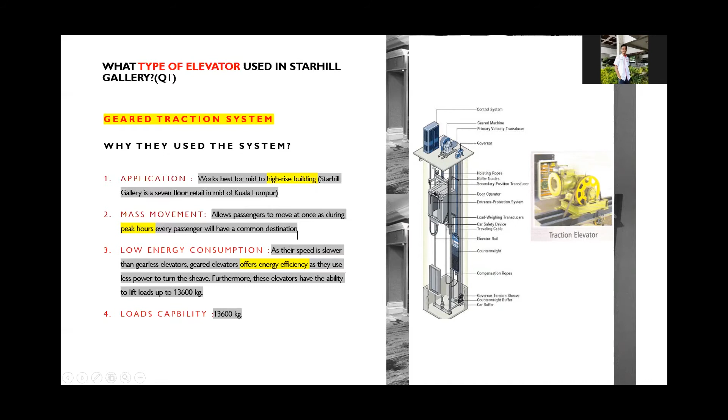As their speed is slower than gearless elevators, geared elevators offer energy efficiency as they use less power to turn the sheave. And then we move to question 2, how Starhill Gallery complements the UBBL. So there are a few laws implemented in the Starhill Gallery for the mechanical handling system.

Okay, so first of all, UBBL law 124, which is for all non-residential buildings exceeding 4 stories above or below the main access level, at least one lift shaft should be provided. So this building consists of 7 floors, so they have a few lift shafts.

And then the next one is openings in the lift shaft. According to UBBL law 151 and 152, lift shafts shall be provided with vents of not less than 0.09 square meter per lift, located at the top of the shaft. So this is the vent for the lift shaft, and every opening in the lift shaft shall open to a protected lobby. So the lobby is protected and not open.

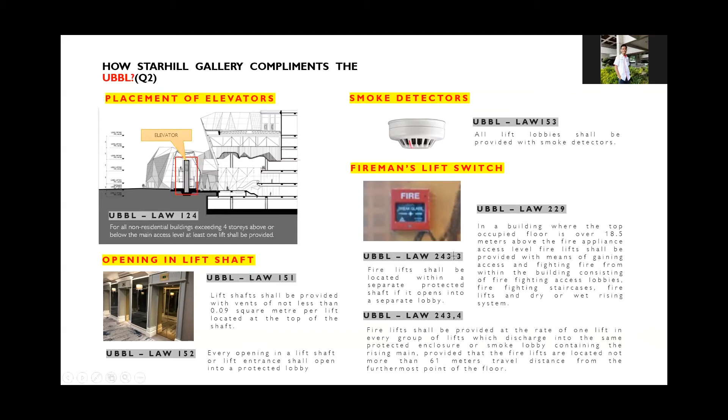And then UBBL law 153, all lift lobbies shall be provided with smoke detectors. So smoke detectors are located there. And then other laws are law 229, and law 243(3) and 243(4).

Okay, next, question number 3. As my friend mentioned before, Starhill Gallery uses a geared traction system. So what control system is used for the elevator? The first one is the collective control system, the full collective, which involves an up and down button on each floor and is able to answer calls in sequence regardless of travel direction. The second one is the motion control system.

It consists of motor, geared engines, brakes, and power supply. The function of this motion control system is to use the electromagnetic brake in the motor to stop and hold the lift car, or control the speed of the lift moving upward and downward. Safety control system consists of safety gear and speed controller, and the function is to provide safe and reliable elevator operation to the passengers.

The next one is the door control system, and it contains a motor connecting the lift car, platform gates, and door safety device. The function of this door control system is to control the closing and opening of the elevators. The elevator car door in Starhill is installed with an infrared sensor. It detects a passenger or objects at the doorway, which prevents the door from closing.

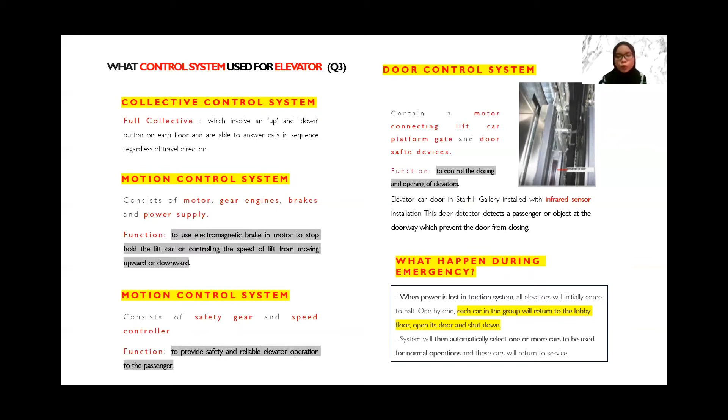Next, we look at the interior design in Starhill Gallery. So basically, there are two types of elevator in Starhill Gallery. First, elevator 1 is located near the entrance of Starhill Gallery, and its feature is a cylindrical shape design enclosed by glass and stainless steel material.

Next is elevator 2. It is located at the shopping mall, connecting the mall to JW Marriott Kuala Lumpur, and its feature is a cubical shape using stainless steel material. For both elevator 1 and elevator 2, the interior consists of guard rails that wrap around the interior perimeter of the wall for support and safety purposes.

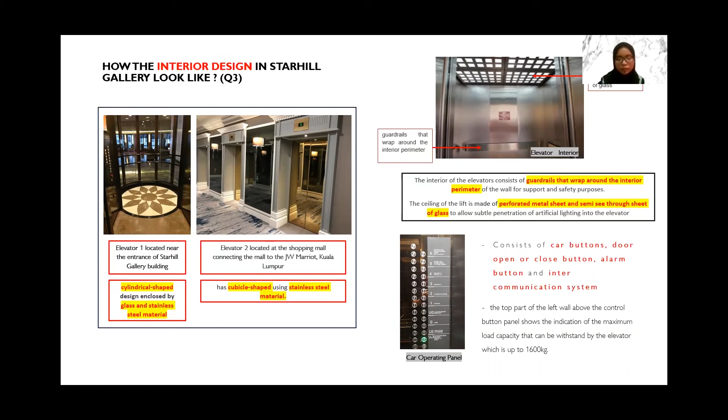The ceiling of the lift is made of perforated metal sheet and a semi-see-through sheet of glass. This is to allow subtle penetration of artificial lighting into the elevator. Besides that, both elevators also have car buttons, door open or close buttons, alarm buttons, and an intercommunication system. These are pictures of the car operating panel of the elevator.

What control system is used for the escalator? They have five. First is the machine drive system. The escalator in the Starhill Gallery uses a modular drive system. It consists of drive machine, gear reducer, step drive system, and handrail drive system. The function of the machine drive system is to provide the force to drive the step band at a constant speed.

The second one is the step drive system. The step drive system consists of step chain, step main drive axle, and step chain sprocket. The next one is the handrail drive system. The handrail drive system contains a handrail drive idler sheave, sprocket, chain, take-up device, and support roller.

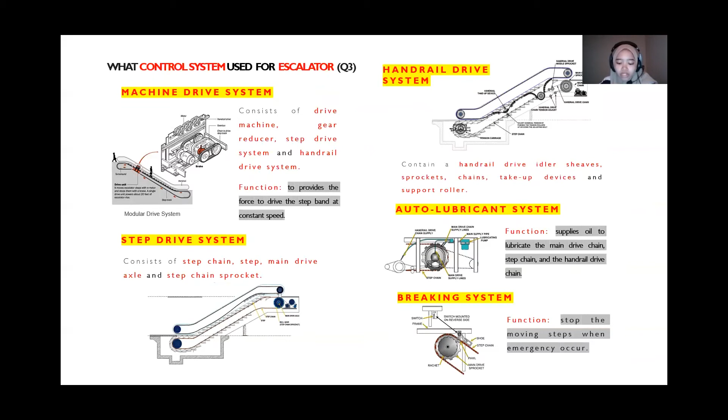The next one is the auto lubricant system. The function of the auto lubricant system is to supply oil to lubricate the main drive chain, step chain, and the handrail drive chain, so it can move smoothly. The next one is the braking system. The function of the braking system is to stop the moving steps when an emergency occurs.

I'm starting with question number 4. That is about the elevator and escalator. So here we can see 2 elevators in the whole system. The location of each elevator is considered well planned, and it is placed at both of the building's entrances and near the staircases that connect each floor, including the basement floor, for emergency purposes.

Elevator 1 is used separately from the main building, so we can use it for entrance purposes. Elevator 2 is located inside the shopping mall in the main building, so people can easily transport themselves from one floor to another. The second point is that elevator 1 is a circular-shaped glass elevator, so when traveling, people can see outside and have a view of the whole gallery and the open spaces.

Elevator 2 is a cubic-shaped typical elevator that we can see in other shopping malls. Then comes the escalator. Starhill Gallery uses a single continuous arrangement escalator. We can see two escalators there. The arrangement plan is a single continuous escalator arrangement, which is a one-way traffic type, so one side is going up and one side is coming down.

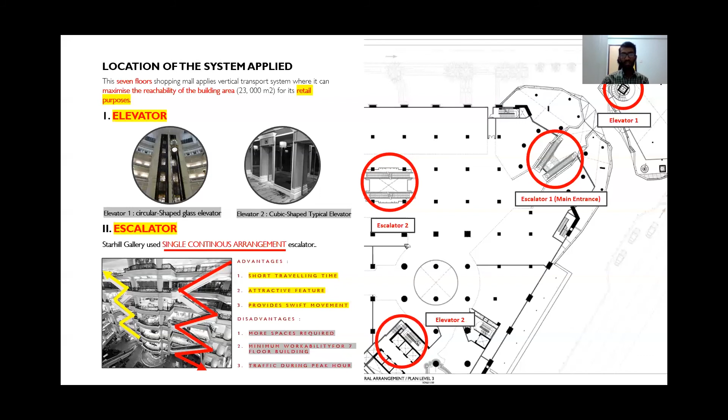The second point is minimum workability for 7 floor buildings, which is similar to the first point. And the third point is traffic during peak hours. Next, I will present the needs of the system in Starhill Gallery, or in other words, the importance of the vertical transportation system.

Elevator 1 is used separately from the main building and located at the main entrance because it is purposely made as a panoramic glass lift, which allows a 360 view of the lobby. It also connects visitor transportation from the main entrance to the central atrium and to each retail floor where escalator 1 is located.

As an additional point on how to improve the existing circulation in Starhill Gallery, we propose a crisscross double escalator system, whose advantage is minimum transport time between levels. We propose this double escalator system because Starhill Gallery is very packed with visitors at peak hours, so maybe in the future this system can be applied.